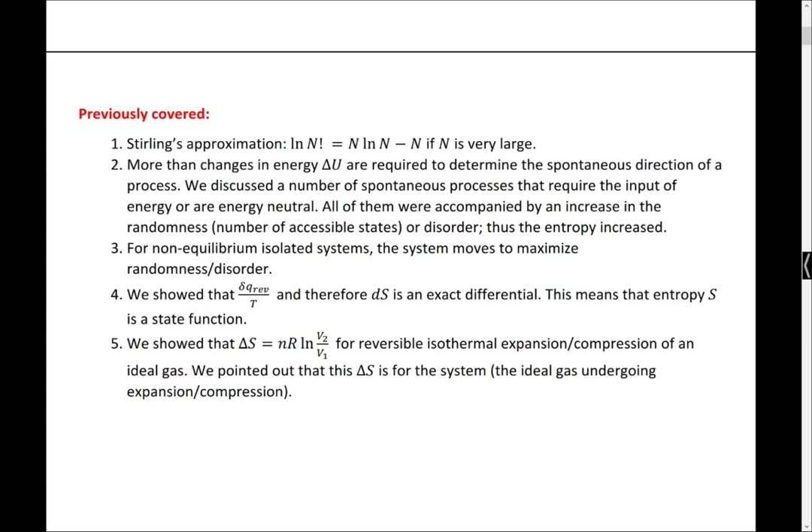So we'll demonstrate it. Now, we didn't show this yet. We were pretty close to doing this. But at any rate, what we will see is that if we're talking about an isothermal expansion or compression of a gas that's performed reversibly, the change in the entropy of the system is given by number of moles times the gas constant natural log V2 over V1. We will explicitly derive that from multiple directions, right? Very important, and I've alluded to this before. In thinking about entropy changes, it's really important to think about the system versus the surroundings versus the universe. So it's really important to delineate those, right?

So we're going to be doing some calculations, looking at delta S for expansion compression of ideal gases. From there, we're going to talk qualitatively about the change in entropy that's associated with a change in heat. And actually, I think we'll do a little foreshadowing on that. So, from the definition, dS equals dq reversible over T. So if I'm talking about my system, and if I add heat to the system, what's the sign of dq? It's positive, right? And temperature is always positive, right? And so that says if I add heat to a system, its entropy will do what? It increases.

And it also says that if I remove heat from a system, I'm going to see a decrease in the entropy. And so if I have a block of iron at 100 degrees and a block of iron at 10 degrees, the entropy of the iron at 100 degrees is greater than that at 10, right? So qualitative. All right, we're not gonna get there today, so we're not gonna bother talking about that yet.

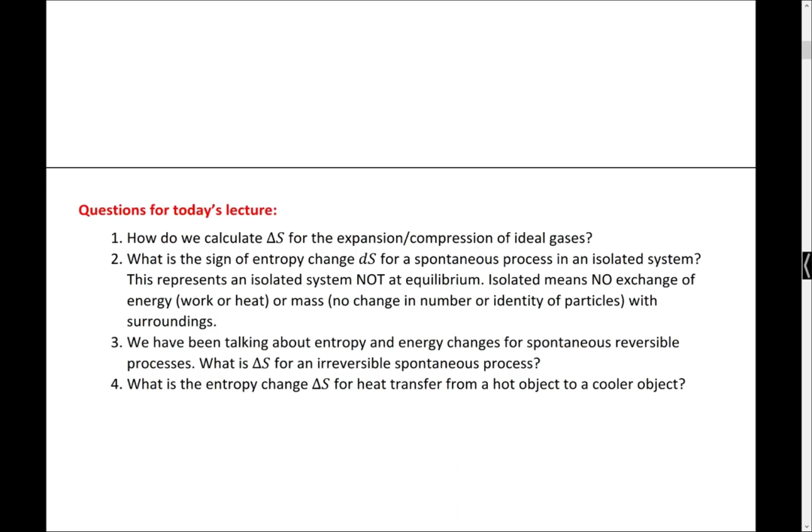Okay. All right. So where we left last time was we were starting to talk about delta S for the isothermal path, and basically we're up to this point where we said we want delta S for path A. We know that that's going to be the integral between our initial and final states of dq over T. So I come back up here and I see that dq for the reversible path is nRT over V dV. All right? So we're going to integrate nRT over V dV. Right? At this point, all that I've put in here is dq reversible. So to get this to be delta S, I need to divide that by T.

All right, and we're going to be going from V1 to V2. Pretty clear. Temperature's going to cancel. Number of moles is constant. R is a constant. That comes out front. So I can say nR. That leaves me with the integral of dV over V.

And what is that? ln. Thank you. Natural log V2 over V1. So that's delta S for path A from the system perspective. Does that make sense? This is pretty important to recognize. So that's going from this initial point to that second point, right?

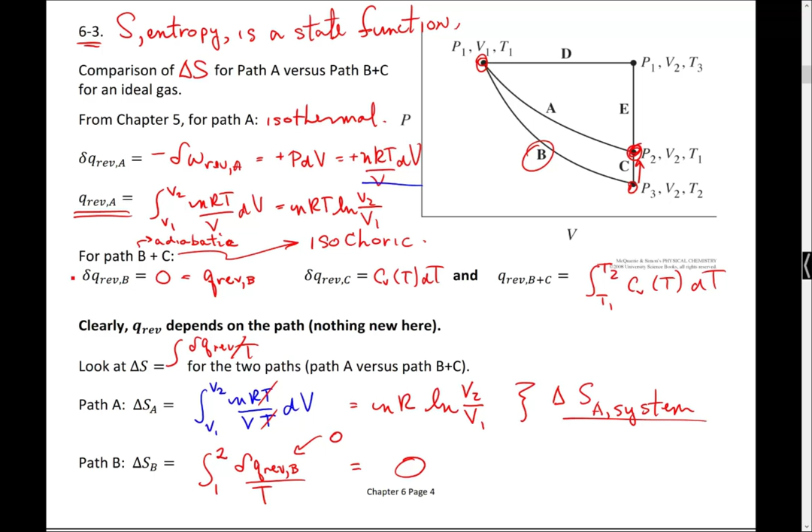So what we're going to do is look at path B. Before we go forward, let's talk again about path B. Path B is our adiabatic path. So that means that Cv dT is the same as dU. And if it's adiabatic, the only thing that I've got going on is work, because dq is equal to 0. So we can say that dU is equal to dw reversible for path B, which in turn is equal to Cv(T) dT. Okay?

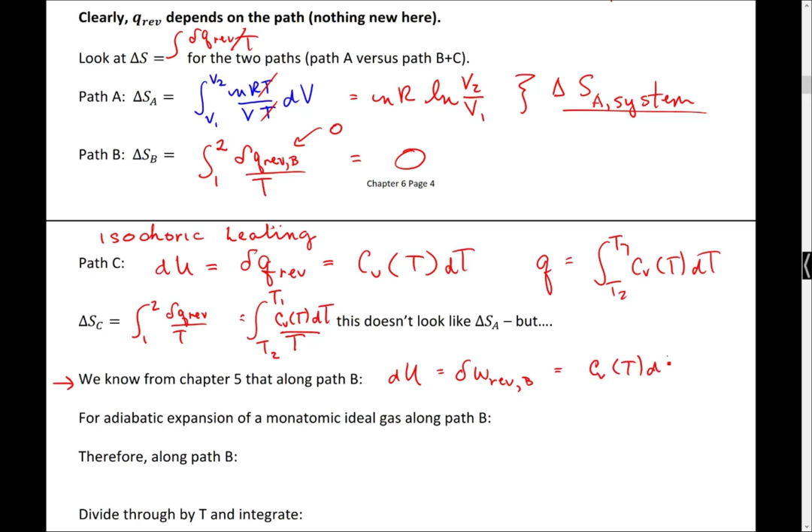And then, of course, we know that this work is the same as minus nRT over V dV, which is equal to Cv(T) dT. We agree? Make sense? Everybody follows that?

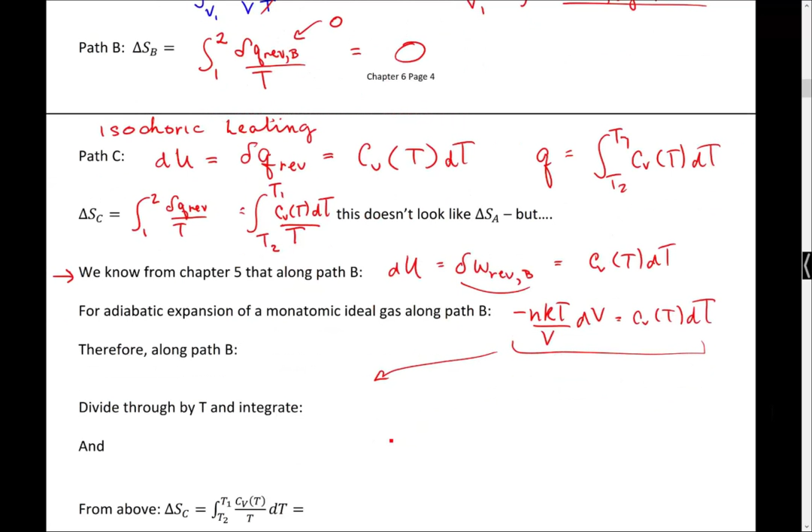So then I'm going to take this equation and divide both sides by T. And you might say, why am I doing that? Well, keep in mind that I'm trying to get at this expression. So if I divide both sides by T, I get there. That's going to get me minus nR over V dV is equal to Cv(T) over T dT. And then we have to integrate it.

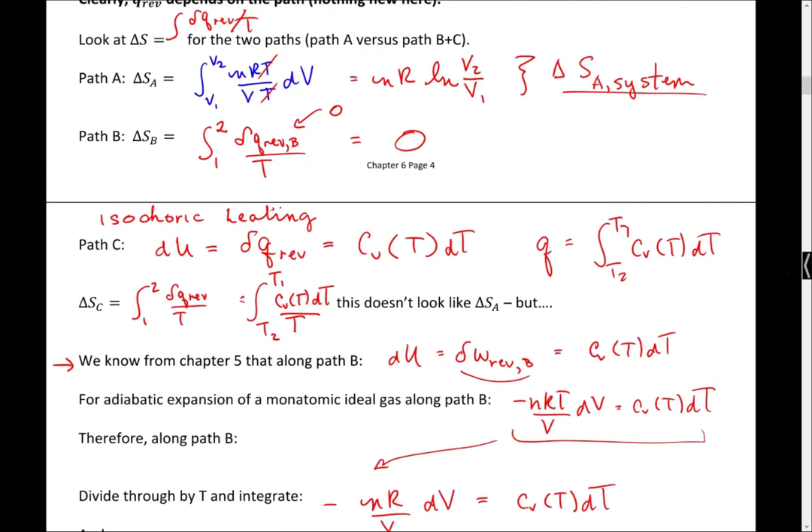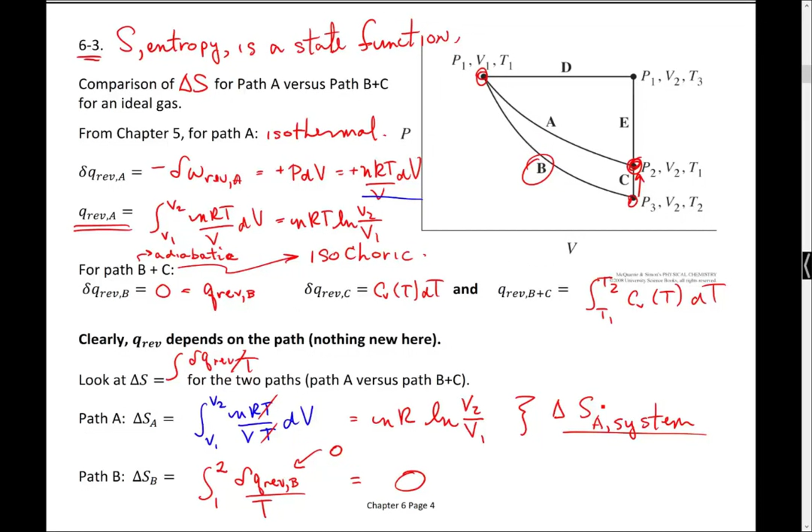And I'm going to scroll back to our picture for a second, because again, what we're talking about is looking at path B. And so our integral will be: our initial temperature is T1, our final temperature is T2.

This is going to be integral. Oops, and I forgot to divide both sides by T. T1 to T2. Make sense? All right, now I look at this and I compare it with that, and I see those are the negative of each other, right? Okay?

And so what I can say then is that delta S C is equal to minus the integral T1 to T2 of Cv(T) over T dT, which in turn is equal to plus nR over V dV. And I forgot to integrate this side. Okay? Integrate both sides, V1 to V2.

Okay? All right. And so what you can do is then the integral. Let me fill this out, V1, V2. All right. This integral is going to be nR ln V2 over V1, as we expected it to be.

Okay? All right. So now I have delta S for path B and delta S for path C, and that pretty straightforwardly goes to B was 0 plus nR ln V2 over V1, and as we expect, we have the same delta S as for the isothermal process, delta S for path A. Okay? All right, so we've demonstrated that delta S is a state function, right?

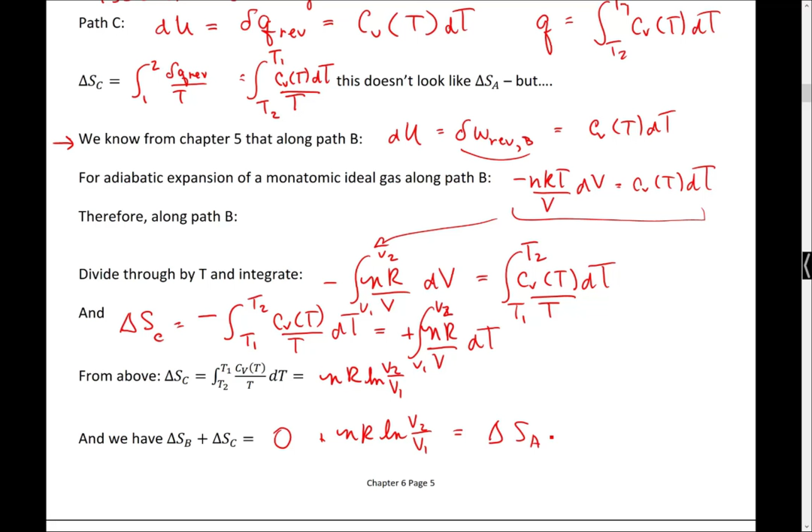Okay, we're going to do one more round of that. And this parallels what we did with Chapter 5, paths D and E. So for paths D and E, before we go through it, let's remind ourselves of what's going on. All right, so for path D, what are we holding constant? Path D, we're holding pressure constant. And we see that we're going from a lower volume to a higher volume. So that basically means we're doing constant pressure heating.

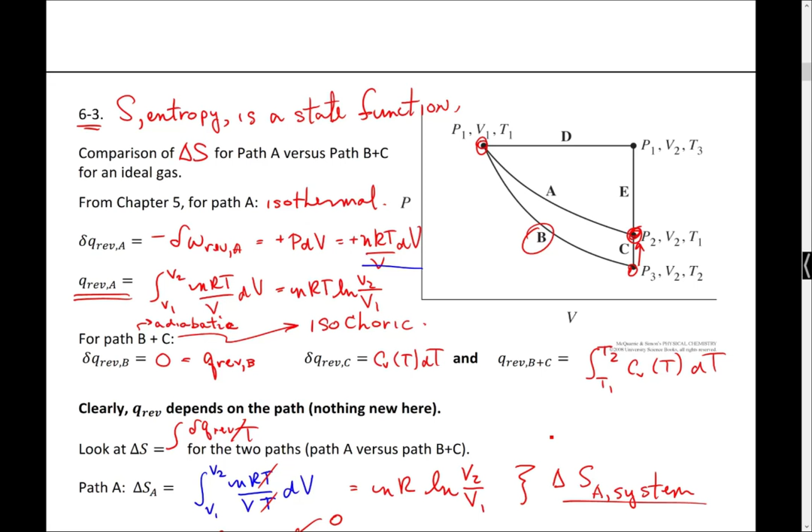All right? And then whenever I get to this point where I've got P1, V2, T3, then I'm doing an isochoric cooling step. All right? So we need to talk about the heat transfer for each of those steps and then use that to determine what delta S is. Okay?

All right, so for path D, we know that dU is going to be given by dq reversible plus dw reversible, right? And because what I'm interested in is getting the heat transfer for that path, I rearrange this and say that my reversible heat transfer for path D is going to be dU, the change in the energy of the system, minus the work, dw, right?

And we know that dU is, for an ideal gas, Cv dT, and work is going to be minus P dV, and because I'm subtracting it, that makes it go plus P dV, right? Now, to indicate that this is a constant pressure process, we're at P1, I'm going to put a P1 down there. All right? All make sense? Okay? All right.

So if I want to determine then what the total heat transfer is, then what I need to do is integrate, right? And so that means I'm going to integrate from T1 to T3, Cv(T) dT, right? And the integral of this term, I know the pressure is constant, so this just becomes P delta V, right? P1 delta V. Okay? Make sense to everybody? All right?

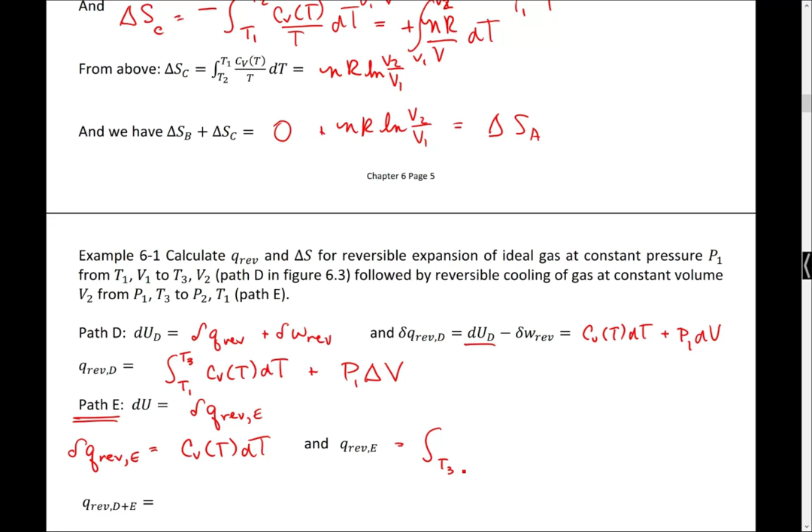Okay, so I have now an expression for our heat transfer, right? And if I want to know the total heat transfer, then I need to integrate. So we're going to integrate here, and we're going from T3 back to T1, Cv dT. Okay? If I wanted to know what the total heat transfer is for path D plus E, I'm going to take this term and sum it with that term, all right? And I was planning to write it all out, but it will take a little bit too much time.

So if I take this, add it to this, what happens to these two terms? They cancel. We go to 0, right? And I'm left with P1 delta V, all right?

All right, so if we go back and look at all the heat transfers for these 3 different paths that we've taken, we find that they're all different, right? Just reiterating that heat is a path function, all right? But if we look at delta S, we have a different story, all right? So delta S for path D is going to be, for completeness, let me write this out, initial to final, dq reversible path D over T, right?

This is dq reversible, Cv dT plus P1 dV. So I'm going to divide through by T, Cv(T) dT over T. I'm going to be integrating from T1 to T3, right? So that takes care of this first term, right? Now we also know that the pressure can be written as nRT over V, right? And so I'm going to do that, nRT

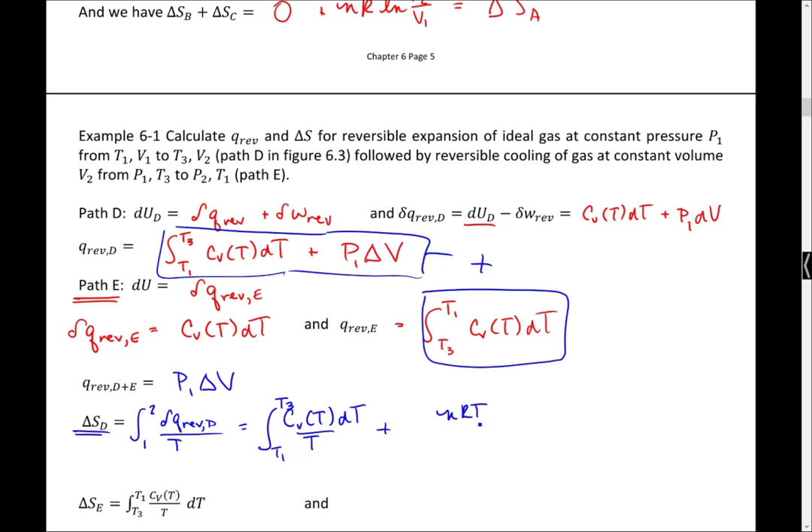over V, and then I divide it by T, and I multiply that by dV. We're going to integrate from V1 to V2. Again, our T's will cancel. All right? And this is going to be the integral T1 to T3.

cv dT over T plus, all right, and then we've done this integral 2 times today already. That's going to be nR ln V2 over V1. Okay?

Any questions about anything that we've done so far? Everybody following? Make sense? All right.

We don't look enthused today. All right. But I know it's the middle of the week after spring break, and everybody's probably thinking about Friday already. Is anybody thinking about Friday already? Yeah. Okay. I'm thinking about a nap, actually.

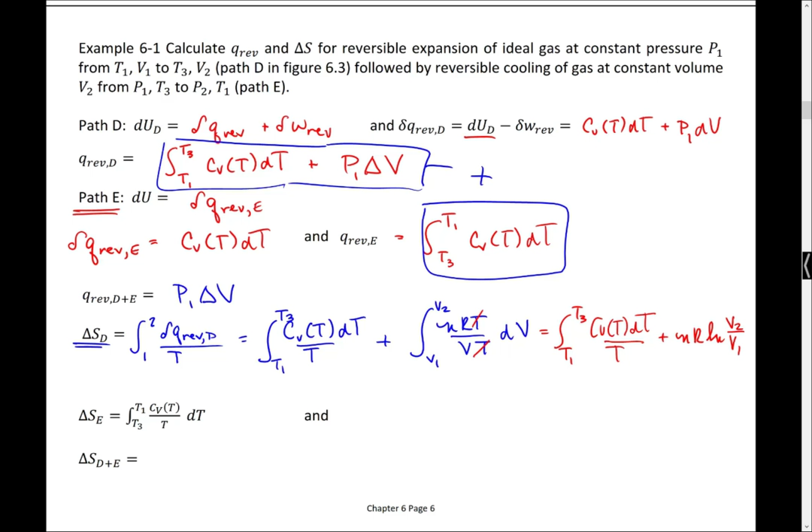All right. And then we can do the same thing for path E. So I decided, because this one's pretty straightforward, just to do this in one step. So dq for path E was Cv dT. To get from there to dS, I'm going to divide by T. So I have Cv over T, and then I need to integrate it between T3 and T1. Okay?

All right, and then I want to know what the overall delta S is. Well, that basically means I'm going to look at this term plus this term, right? And what we see is that we've got this integral, T1 to T3, which is identical to this integral, but the limits are reversed. So again, that goes to 0, and I'm left behind with nR ln V2 over V1, which we have seen is the same as delta S for path A, which is the same as delta S for path B plus C. Okay?

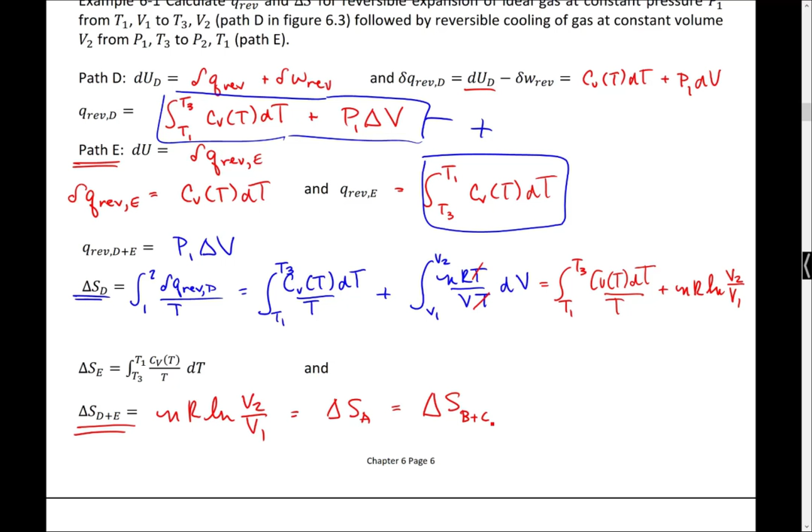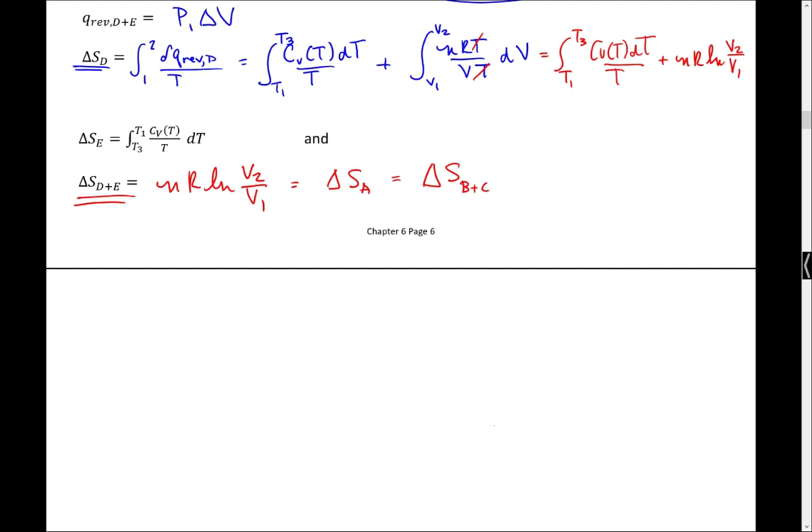We good? All right. Okay, so we've demonstrated from 3 different perspectives that entropy is a state function, and clearly heat is not. So what I want to do is take a moment. I've added an extra page in here, because right now, all we've talked about up to this point is delta S of the system. So I want to look at a little broader perspective, look at delta S of the surroundings, as well as delta S of the universe.

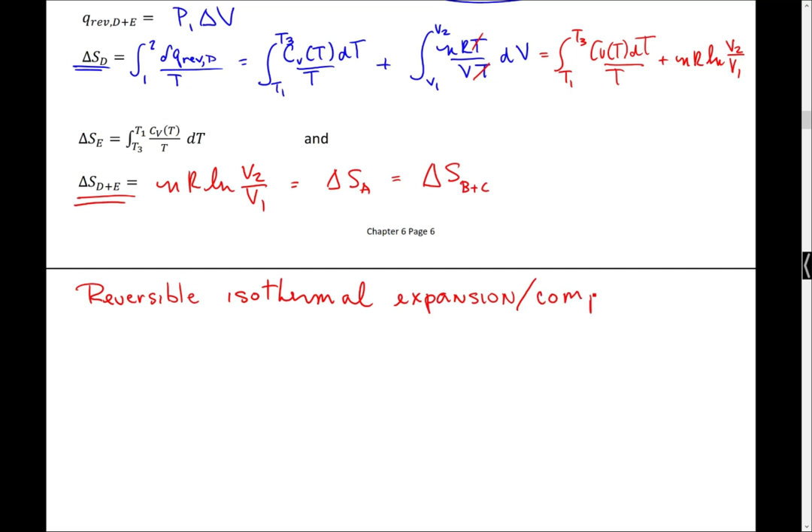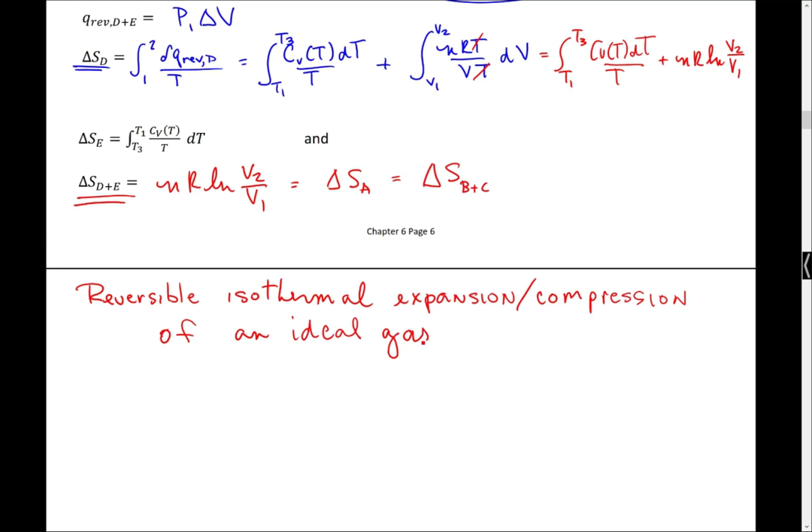So specifically for reversible, isothermal, expansion, or compression of an ideal gas. And what we've demonstrated is that delta S of the system for this process is given by nR ln V2 over V1. Okay? All right, so all I've done is just reiterate what we've done up to this point.

And what I want to remind everybody is that this is basically the same as integrating from our initial point to our final point, dq reversible, for our system over the temperature, right? Because this is the same as this. Okay? All right. So then we want to talk about delta S of the surroundings. So delta S of the surroundings will be the integral from our initial state to our final state, dq reversible over T. But in this case, because we're talking about the surroundings, this will be the heat transfer to the surroundings, or with respect to the surroundings.

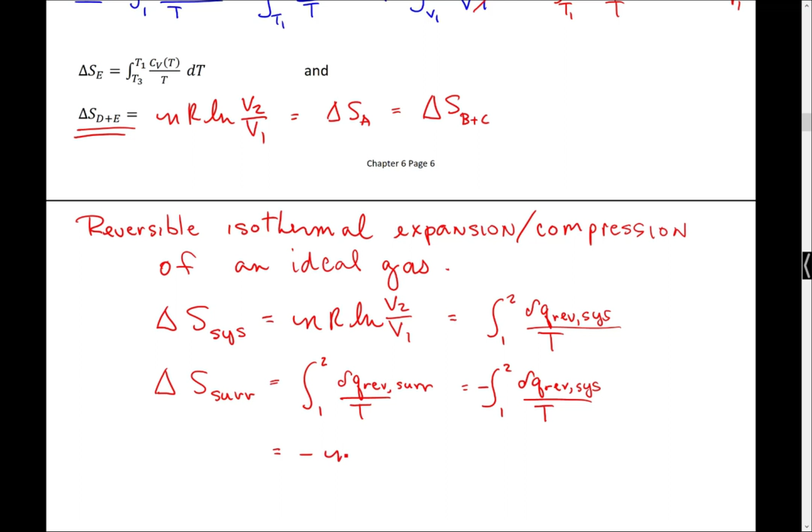So now the question is how is this related to the heat transfer of the system? It is equal but opposite in direction, right? Because if I transfer heat out of the system, it goes into the surroundings. And it's exactly the same amount. So that means this is equal to integral between 1 and 2 dq reversible of the system with a minus sign in front, right? And we already know that this integral is nR ln V2 over V1. So this is going to be equal to negative nR ln V2 over V1. Okay? Does that make sense?

All right, and then if I said, well, what's delta S of the universe? That's going to be the sum of the entropy change of the system plus the surroundings. Delta S universe equals delta S system plus delta S surroundings. And in this case, what does that come out to be equal to? That's going to be equal to 0, right?

Now, this was derived explicitly for a reversible isothermal process. And the key part of it is reversible. If you remember, when we've defined a reversible process, we've said that a reversible process is a process in which we are at equilibrium every step of the way. And if you think about it, if you're at equilibrium, there's no impetus to go forward or back. Right? So what we can conclude from this is if we're at equilibrium, delta S is going to be equal to 0.

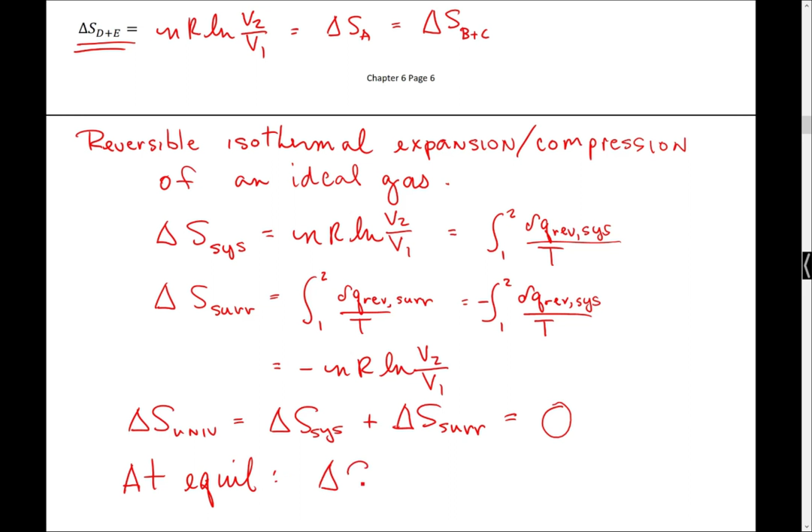All right? So delta S of your universe or your delta S of your isolated system. Okay? Does that make sense? All right. We've also said that reversible processes are limits, and we don't often see them in the real world. Right? And so what we're going to see in general, if we have an irreversible process, delta S won't be equal to 0. It's going to be greater than 0. Right? But we're going to demonstrate that.

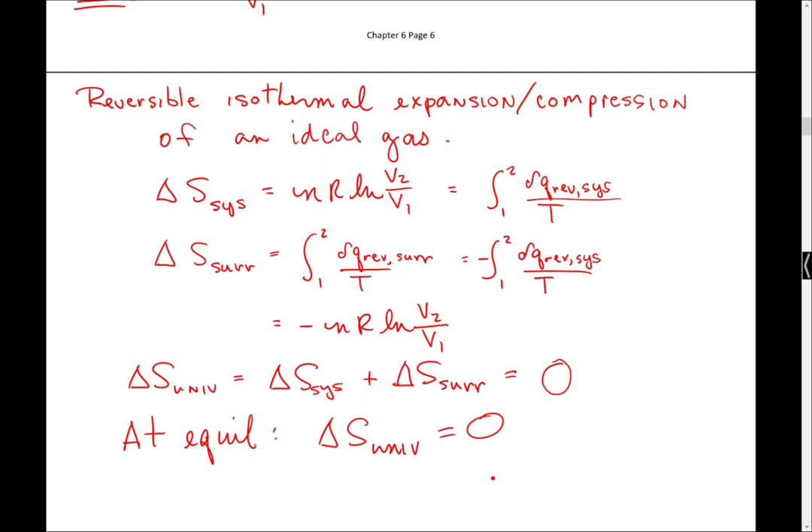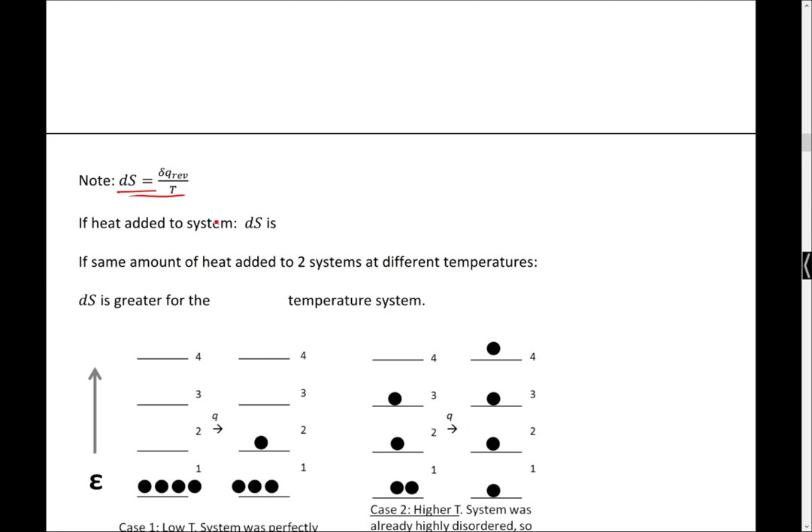All right, so let's talk about some qualitative things. So we've already discussed the sign association. So if I add heat to a system, that means dQ is positive. dQ reversible greater than 0. And that results in an increase in the entropy. All right. That also means the opposite. If I remove heat from the system, dQ is negative, and dS will be negative.

Okay? All right, the other thing I want to do is I want to take a look at what happens if I add the same amount of heat to systems at two different temperatures. Right? And this is just a demonstration, and it's not good mathematics. So I'm just letting you know this is an approximation, because we know that dQ is infinitesimal. So my first violation of that is I'm going to say let dQ be equal to 1 joule. And then I want to see what impact that has on dS of a substance at two different temperatures.

So I'm going to create a little table. I'm going to have 10 K, and I'm going to have 10 to the third K, so it's 1,000. All right? And then we're going to say dS. I'm going to put that in parentheses because this means it's an approximation and I'm playing bad arithmetic. So this will be given by 1 joule over 10 K, which gives us 0.1 joules per K. Okay? So this says that if I add a joule to my system at 10 K, I see a change in entropy of 0.1 joules per Kelvin.

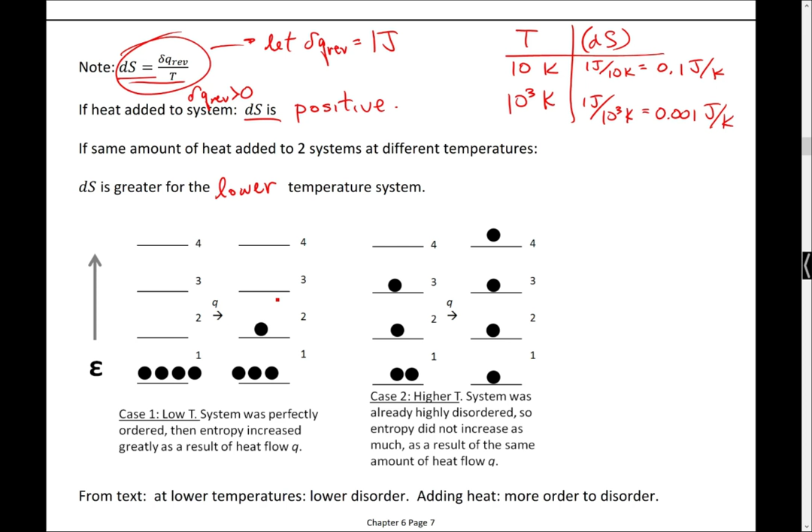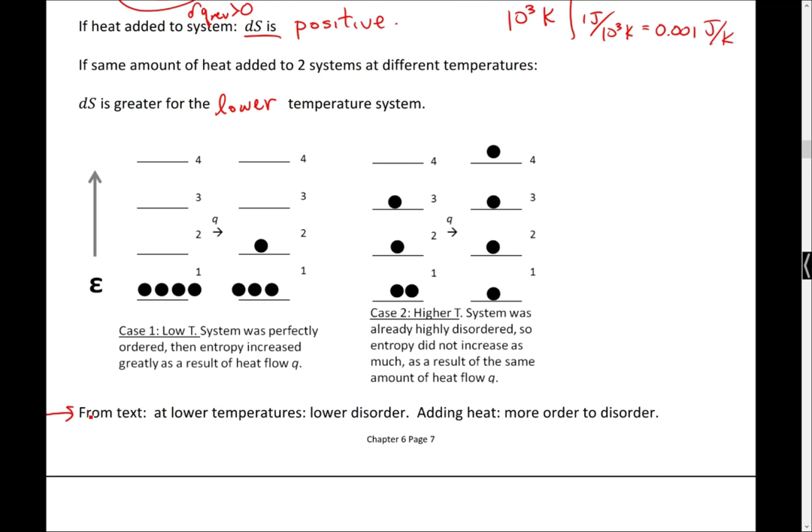Okay. The way that your textbook words it, and this is succinct, if we're at lower temperature, we have more order or lower disorder. And that means that if I add heat to that system, there's more order to be disordered. Okay?

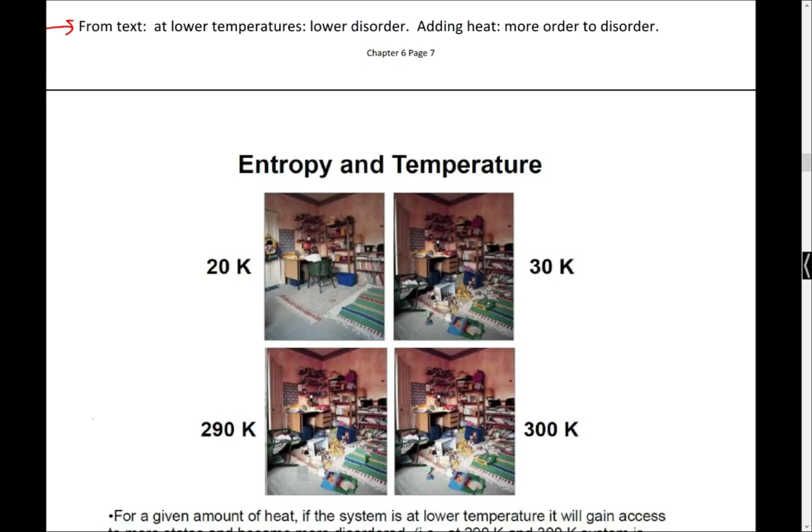Right. Let's see. At this point, I think what I want to do is we're going to work on a quiz together. Find a team if you'd like.

All right. And if you pass this down there, are you a team? You want to be a team? If you could pass one down to the other end, that would be appreciated. Okay, we've got you. Thanks. This is where I start to get worried. Can you guys divide yourselves into two teams back here? Does that work? I mean, I can print some more out, but that's what I got.

All right, what we're going to do is part of this we're going to work together, and then there'll be a couple questions that I'm going to let you guys work on your own.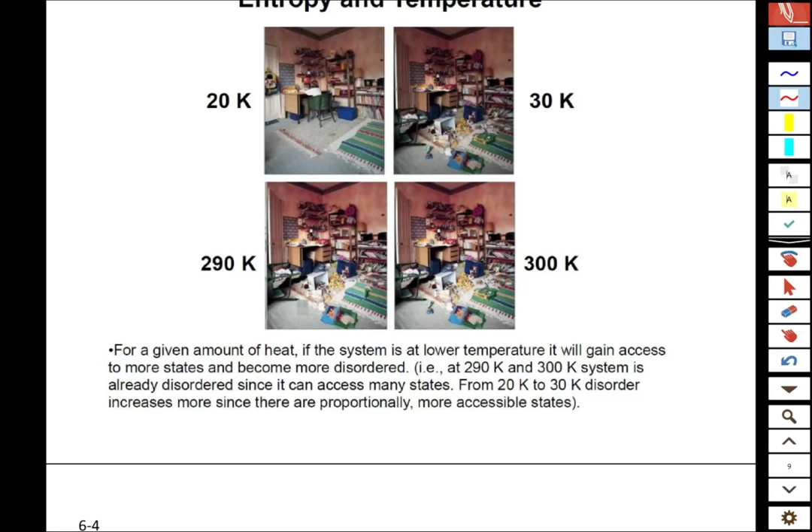All right, so let's talk a little bit about the problem. We've got two pieces of aluminum, all right? And we're putting those two pieces of aluminum, we're isolating them from the rest of the universe. One of them's hot, one of them's cold, okay? And they can't exchange with the rest of the universe. So everything that occurs has to occur between those two blocks, all right?

What do you expect to happen? Yeah. The temperatures will equalize, right? So the hotter one's going to get cooler, the cooler one's going to get hotter. Which way does heat flow? From hot to cold, right? And the Q from the hot is related how to the Q from the cold? They're going to be equal to each other, but opposite direction, right? Because if the hot one loses 10 joules, it goes into the cold one, and it's going to get exactly 10 joules, opposite sign.

So we can say at the outset, QH equals Q cold with a negative sign in front of it. So the goal is to find out the temperature at the end of this. And what we need to know then is the relationship between the heat added and the temperature change. The information that we've been provided is the molar heat capacity at constant volume, and the amount of the substance.

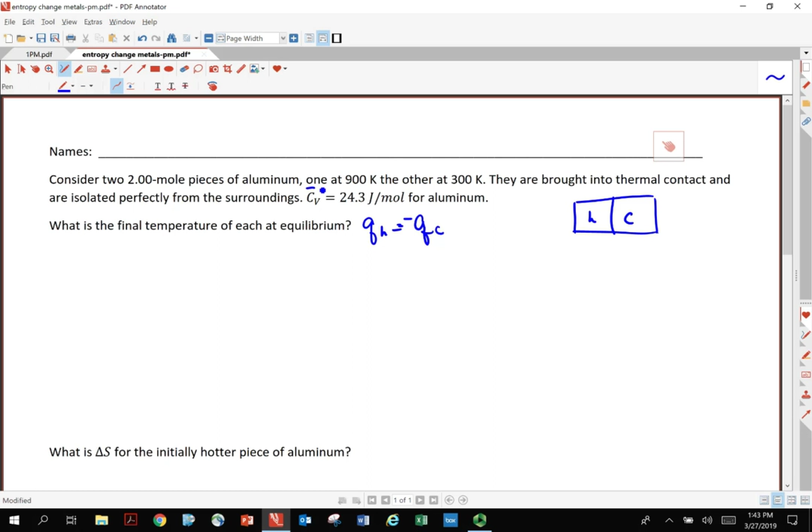So what we can say then is that Q in general is going to be equal to number of moles times the heat capacity times the change in the temperature. Does that all make sense? Because this is Q, not dQ, I need to integrate this between T1 and T2. All right, so let's set that up. So for the hot side, I've got an integral. Our initial temperature for the hot one is 900 Kelvin. We don't know the final temperature, so I'm going to put TF in there.

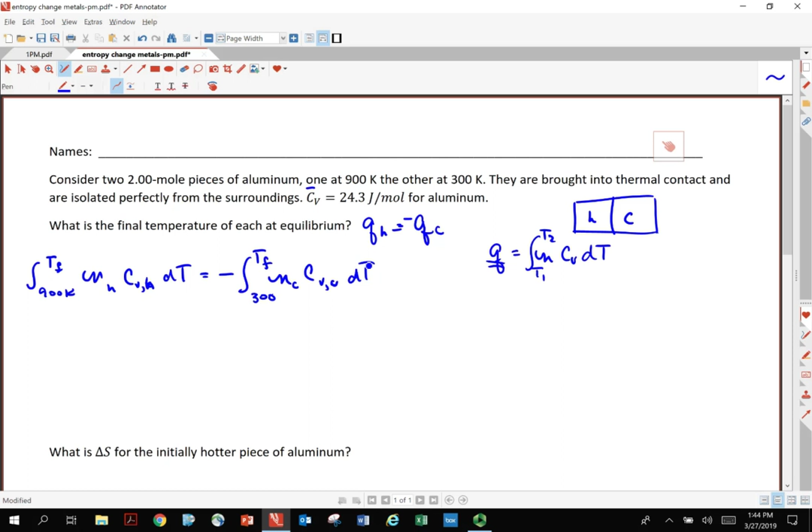Number of moles for the hot, heat capacity of the hot, dT, is equal to the negative of the integral from 300 K to the final temperature of number of moles of cold, heat capacity of the cold one, dT. So let's step back and look at this a little bit. I've chosen to make both of these blocks have the same number of moles. And so that means NC is the same as the other N.

I don't know how to change the color of my pen here. Oh, there we go. All right.

So what happens to N on both sides? It cancels. I've also chosen the same material, aluminum and aluminum. So what happens to the heat capacities? They're going to cancel. So that really means that I have left the integral of dT, which is going to be delta T. So for the left side, that's going to become Tf minus 900 K. And for the right side, that's going to be the negative of Tf minus 300 K.

I'm going to do a little bit of arithmetic here. So this will be minus Tf plus 300 K. And then the algebra says I'm going to add Tf to both sides. And what do I end up with on one side? 2Tf. And what's that going to be equal to? Somebody? 1200. Thank you. And therefore, our final temperature is 600 Kelvin.

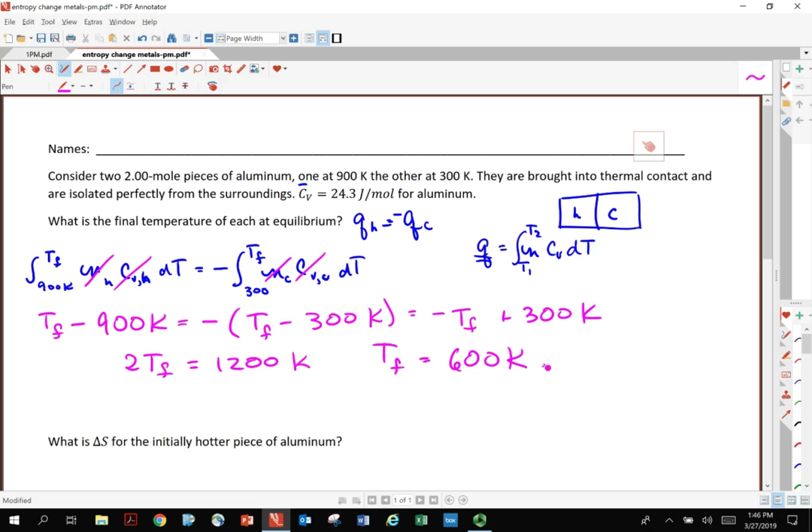We step back and say, does that make sense? Well, I have equal moles, equal mass, and I have the same heat capacity. So I really expect that my final temperature is going to be the average of the two initial temperatures. This is specific for this example. If I had gone aluminum and gold, that wouldn't have been the case, but it's still going to be calculable. All right, so at this point we know the final temperature.

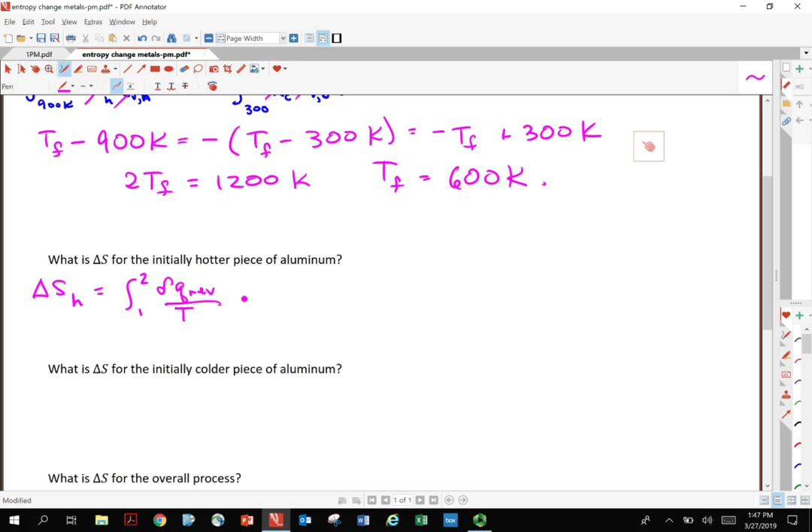Then we can ask the question, what is delta S for the hotter piece of aluminum? So that's going to be delta S hot, the integral between the initial and the final state of dq reversible over T. Now we come back up here. Q was given by the integral, so dq is going to be n Cv dT. We know the limits of integration. Our initial temperature was 900 Kelvin. My final temperature was 600 Kelvin. And I left one thing out. What did I forget to do? I need to divide by T.

Okay, from here it's plug and chug. So N is 2 moles, 24.3 is the heat capacity. So I have 2.00 moles, my molar heat capacity, 24.3 joules per mole per K. And then I'm left with the integral of dT over T. That's going to be ln of T2 over the initial.

All right, so let's take a look at this. This is positive, this is positive. What's the natural log of 600 over 900? Is that going to be positive or negative? 600 over 900, that number's less than 1, right? So the natural log of it's going to be negative. And that's what we expect as our answer, a negative value, because we're taking heat away from that object. And that comes out to be minus 19.7 joules per Kelvin.

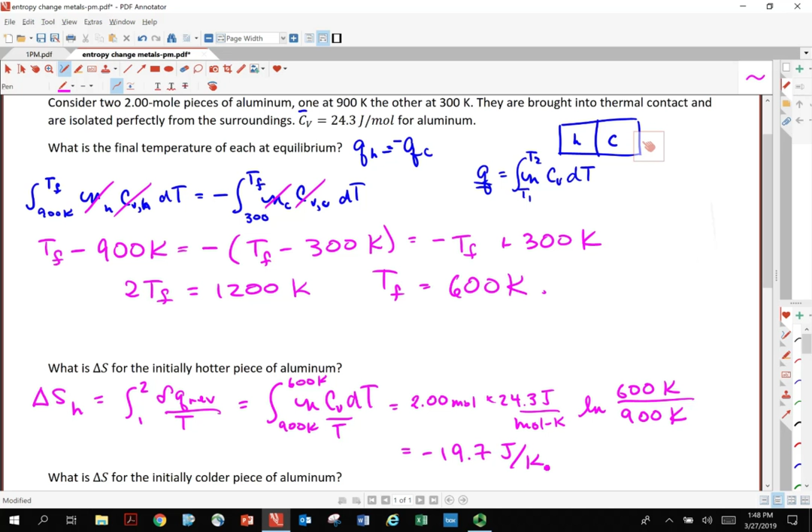Okay, why aren't you moving?

There we go. All right, we can do the same thing for the cold piece of aluminum. So now I have delta S cold, right? We know that that's going to be the integral from state 1 to state 2 of dq over T. So I don't need to write that again. And it's going to be the same general form, nCv over T dT, but our limits of integration are going to be different now, right?

So this is going to be 2 moles times 24.3 joules per mole per K, natural log. Now my final temperature will be 600 Kelvin, and our initial temperature was 300 K, right? So this is a natural log of 2. Is that a positive or negative number? That's going to be positive, right? And that means this whole thing is positive, as we expect. And that comes out to be equal to plus 33.7 joules per K, right?

Okay, so let's also step back and talk about this a little bit. We see that the delta S's are different than each other in magnitude, right? And that's because we've just said that if we have a higher temperature object, the same heat transfer will result in a smaller change in entropy. So for our colder object, we see a larger change in entropy.

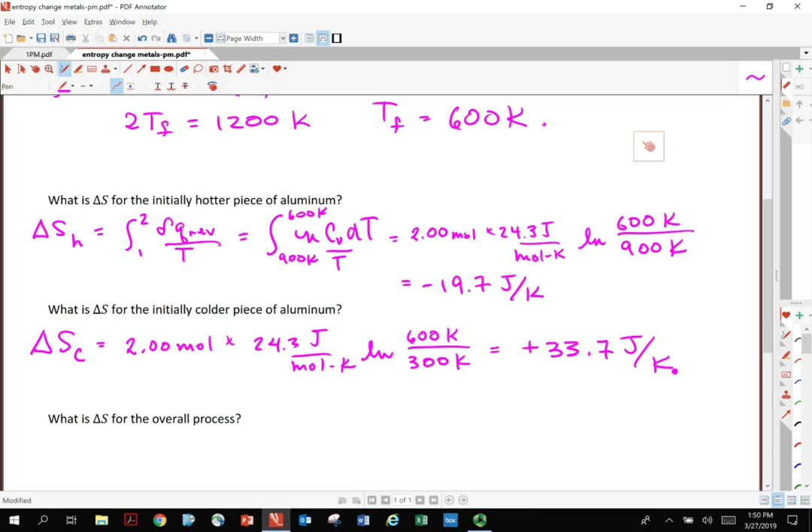And then we put that together and say, well, what's delta S for the whole process? That's going to be delta S for the cold plus delta S for the hot. And that's going to sum to 33.7 joules per Kelvin minus 19.7 joules per K. And that comes out to be equal to plus 14.0 joules per Kelvin. So for the overall process, we see the entropy of the system has gone up.

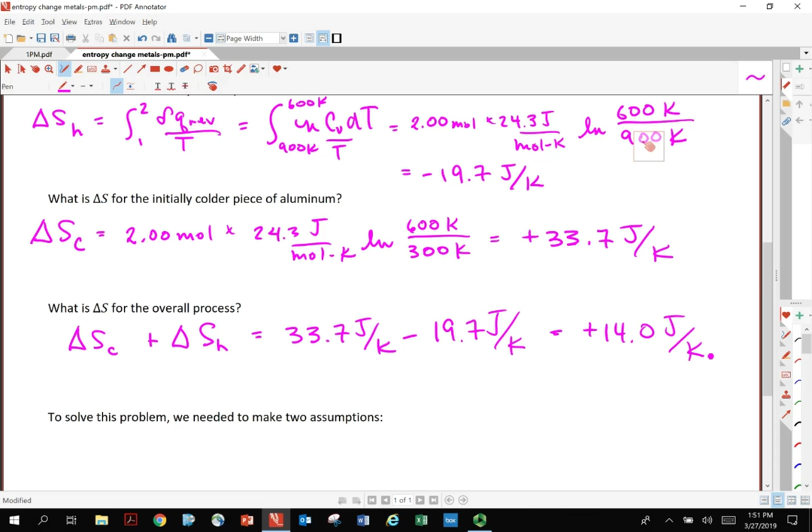Now we've also established that the heat transfer between the hot and the cold, they're equal and opposite. And there's no work going on. There's no interactions with the outside. So what's delta U for this process? Anybody? It's going to be 0. And that's because we can say that delta U is equal to the total heat transfer plus W. W is equal to 0, right? And for all the heat transfer, we've got Q going from the hot, and that's going to be equal and opposite to Q for the cold, right? That make sense? Okay.

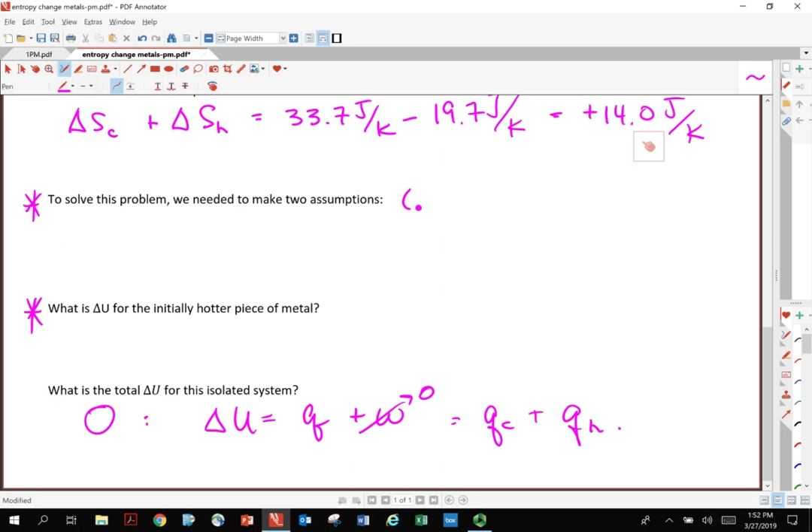So, big picture thing, our isolated system, no change in the energy because it's isolated, but we see, because we're not at equilibrium, an increase in the entropy. All right, so what I would like you guys to do, we'll give you 3 minutes. I'd like you to calculate delta U for the hotter piece of metal. Do that first. And then think about what we've done. We've needed to make some assumptions. And I'm going to help you with that. Look at the heat capacity. There's 2 things that we've assumed in using the heat capacity that we've used. I'm going to give you 3 minutes, and then we'll collect them.